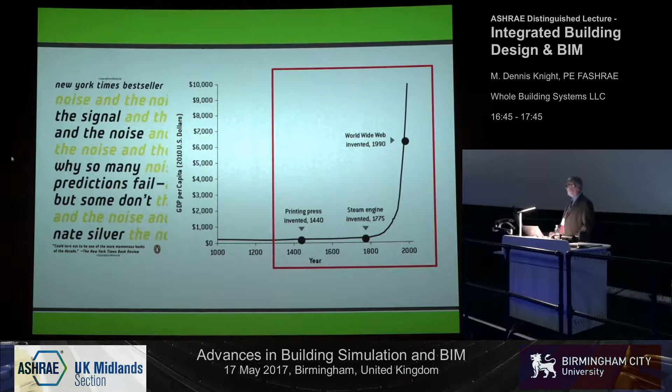So we've already talked about that. Some of the things we're going to talk about are BIM, integrated design. A little bit about my experience.

Throughout my career, I've been fortunate to be able to own several companies, one being an MEP design-build construction company and a general contractor, but also manage an architectural firm. And now, as I work toward using this gray hair to retire, I'm doing commissioning and trying to lend my experience to design teams in a design assist role to help avoid some of those lessons learned from my School of Hard Knocks. All right?

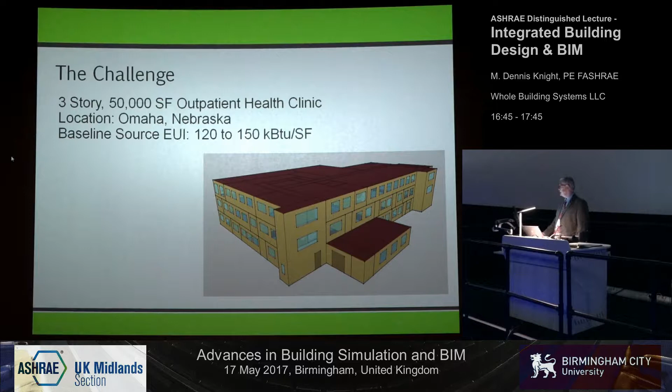After we said they had a baseline EUI, we gave them that, and from that point on, they were free to use that baseline to try to get to net zero. You can probably infer from the team names what software tool they were using, but I won't tell you what they were. But we had some great creative solutions, and these are modelers, okay? Some practitioners as far as design engineers. One team had an architect.

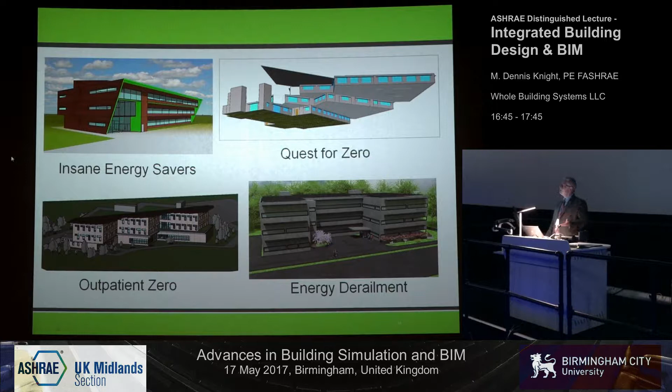This one right here, that's Annie's team using EnergyPlus right out of the box. Annie doesn't use a graphic user interface, and she can make EnergyPlus sing. So if you haven't got to know her, she's a great resource over here for any of you doing modeling. She is the chair of this year's conference, and she's chosen to take an existing building in Washington, D.C. this year.

And we have right at 100 people signed up with 10 teams this year. This year, they're not software developer-driven teams. They are actually led by practitioners who volunteer to work with a group between now and the end of September on the challenge. And then they come in, everybody does a poster, and then we evaluate and go through the first round of judging, and the top 3 to 5 are asked to present. They're given 15 to 20 minutes apiece to present.

And then we take half a day, just like this room right here, of Q&A from the practitioners and developers in the audience to have a conversation, just like I mentioned getting started, so we can learn from each other. How did you do this? What was your workflow? We're not looking for a specific outcome.

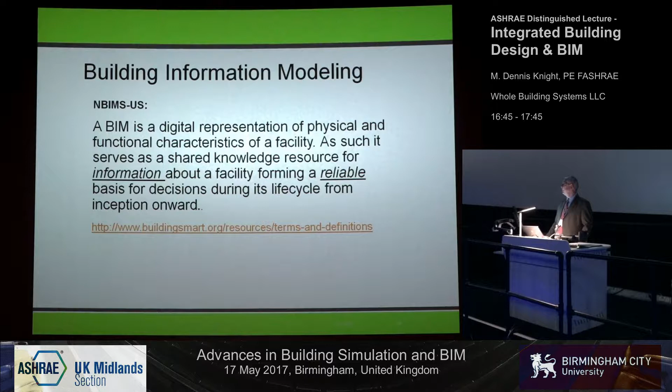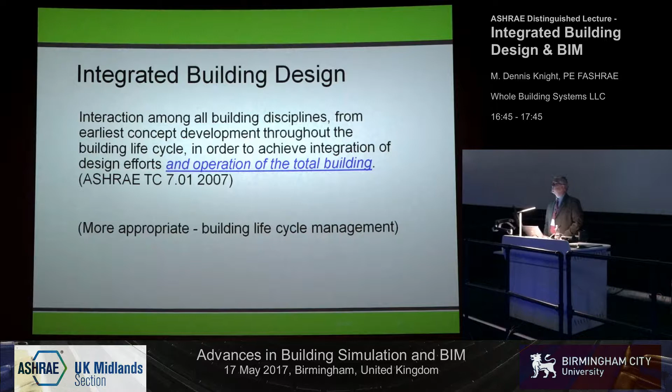And integrated design, again, it's the interaction amongst all the disciplines, and again, through the life cycle. This is ASHRAE TC 7.1, chapter 59 of the applications handbook, and includes operation of the total building. If you go to an architectural contract, an engineering contract, again, most of the time they stop at the end of construction.

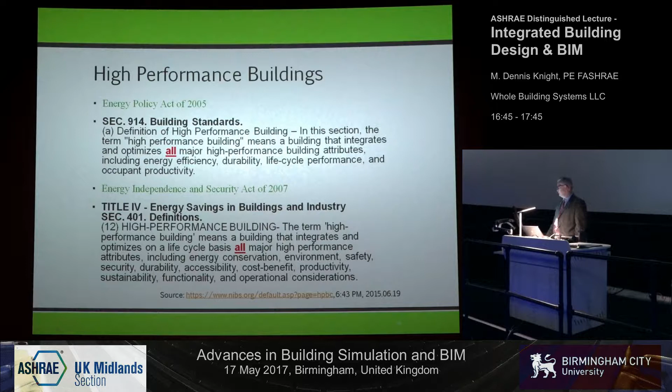High-performance buildings, their definitions. I often worry about definitions that use the words in the definition. All major high-performance building attributes, including energy efficiency, durability, life cycle, etc. But is there anything missing from those definitions? I mean, those are big, broad words. Lawyers would love them because they're hard to define, right? But how about things like indoor air quality? I'm sure they're embodied in those words, but there's no definitions for it.

Comfort, what's comfort? Visual, environmental, acoustic, indoor air quality. Anybody got any others? I mean, how might we define a high-performance building? A little feedback. User happiness. There you go. And I think we will tend to not focus as much on energy in the future as our rating systems and our codes move more toward performance. And it's got to be all about people, right? Health, safety, welfare, happiness, cognitive ability, the effects of the building and its environment on your brain.

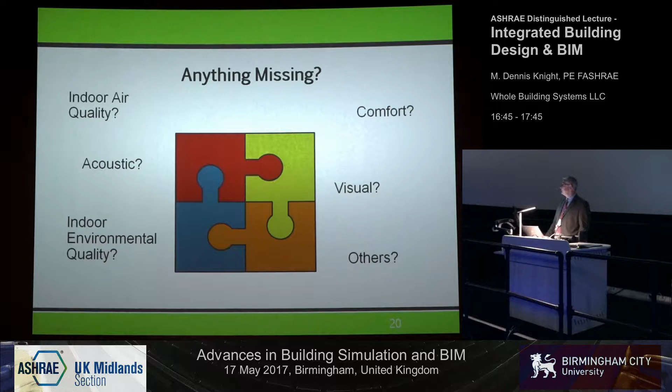And these tools will have to morph and begin to do that kind of analysis, not just daylight analysis, energy consumption, thermal comfort maps, but be able to simulate under many conditions, even disaster conditions, whether an indoor environment's tenable or not. That's why I asked about the fire simulation earlier.

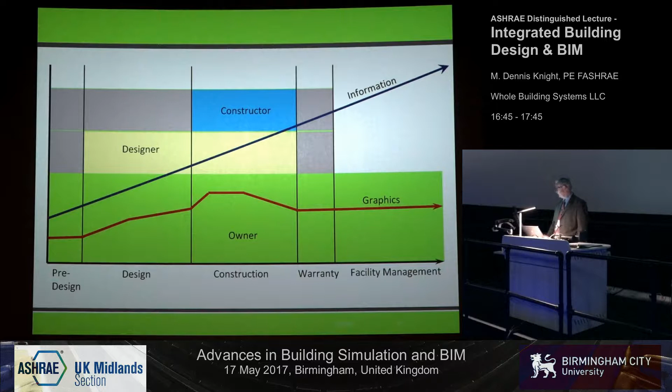So, who are the stakeholders? Pretty much everybody. This person typically holds the gold, right? And drives the train. But sometimes having the conversations early enough and asking the right questions, having that checklist-driven design based on your experience, and I'll show you kind of my manual process right now before I go into any kind of BIM analysis in a minute, of what a workflow might be, and hopefully at some point will get automated in these tools.

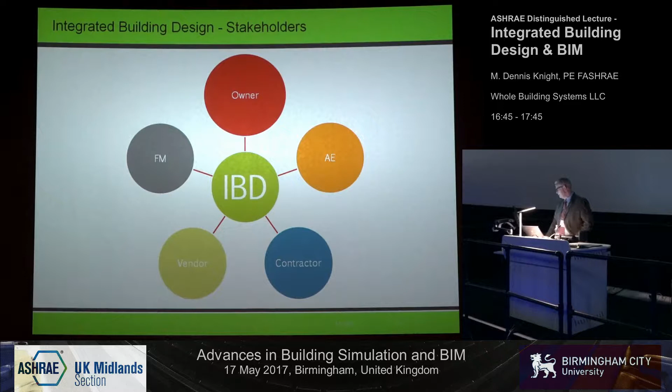But here's our stakeholders. What makes a building unique? Every building is unique between its site, its envelope, its uses, its systems, but also its users, its climate, its region, the culture of the people using the building. All those things make a building unique. And you as a designer or researcher have to understand that when you start developing these tools and working on these engines that can look at the various scenarios and come to those optimized solutions, or that series of optimized solutions, because there's not one, never will be one.

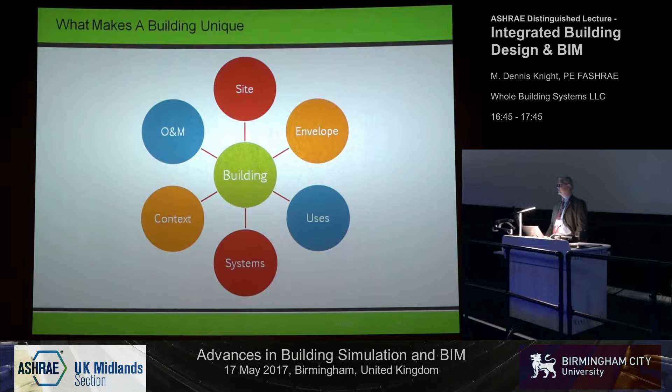Life cycle of a building, again, it's starting at planning, going through design, construction, verification. That's key. I do commissioning, and I've had so many texts and conversations with my colleagues back in the U.S. over the last 2 days on 3 university projects we got finished up now. We started pre-design with the owner, with the owner's project requirements. We defined envelope, indoor environmental quality, HVAC system design conditions, controls, interfaces, interoperability, and the school's got to be ready to be opened at the end of the summer.

And after numerous meetings between disparate systems such as lighting controls and building automation, you still have people that will not talk to each other until the day they show up on site to start their work. So we've got a little bit of a cultural shift we've got to work through there too. Training.

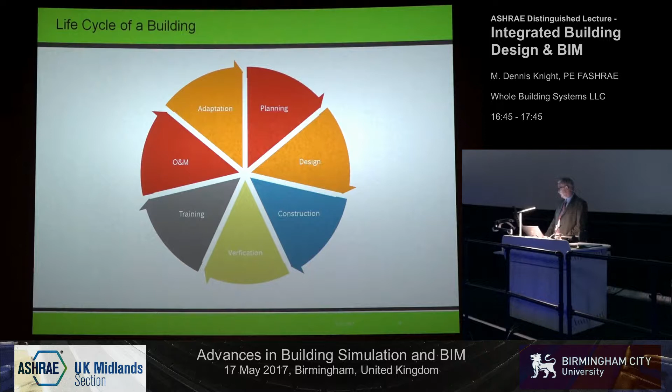In BIM, I'll just use this as an example, I see a lot of research going on. Some really nice things about how to use the data and do good things in BIM. I don't see many universities actually training a practitioner base to use these tools and use them well. If we don't get to talk about it before I'm through, I'd like to have some conversation with you all, and maybe at dinner tonight with my colleagues at CIBSE, as to where the universities are going with training our next generation of actual designers and the like. We should use a continuous improvement process: plan, do, review, that's ISO.

Now, BIM is a bunch of tools. We've been talking about tools all day, right? This is not proprietary. I'm not advocating one, even though some of my examples will use a tool, but there are a lot of good tools out there, and more coming online every day. When I started, we were using hand calculations and the ASHRAE Handbook of Fundamentals and solar tables, and to run just a simple 2-story office building could take you a couple of weeks sometimes.

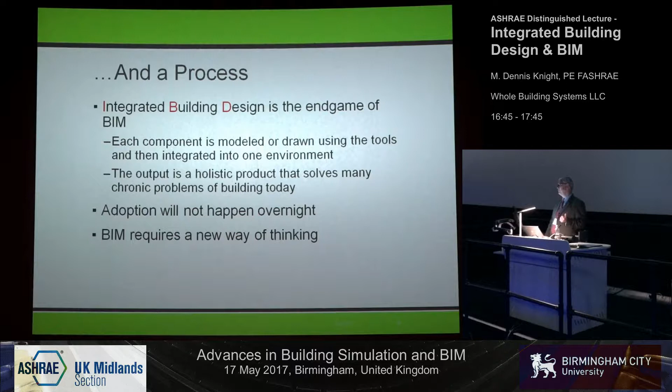Integrated design is the end game, right? We want to provide a building that does what the owner wants, that satisfies those user needs. But why is that important? Well, owners don't like when things like this happen, or this. Believe it or not, that's an actual university dormitory, and that's not just one room. That happened in about 140 dorm rooms before the engineer, the contractor, the building official, or anybody caught it. It was right at the final inspection when the state engineer caught that you don't put an electrical panel in a shower.

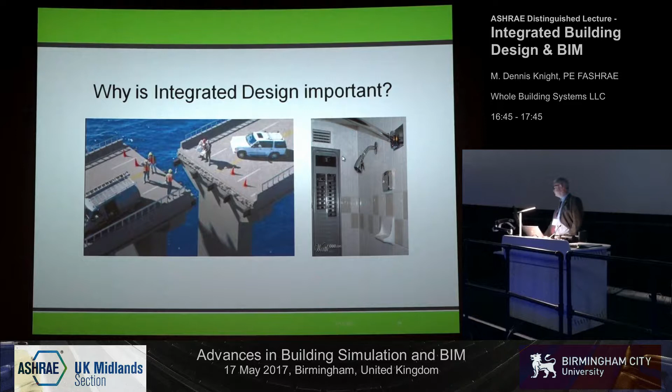All right, so what's our current process? As designers, we still work in silos. Everybody wants to do their job once, right? We don't want to spend any extra time. We don't care how many times you consider how to lay out the structure or the architecture or the lighting. The MEP guy wants to design the HVAC once. Our handoffs are poor. Right now we still hand off things in a manual fashion 7 or 8 times in 7 or 8 different formats. And that's a tremendous opportunity for errors and omissions to creep in, and BIM and our software and cloud-based solutions can help us solve that.

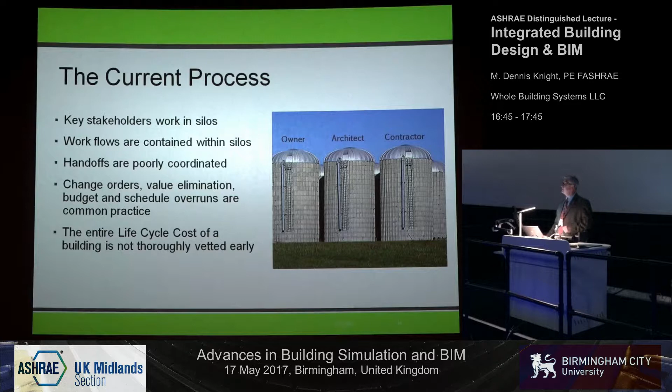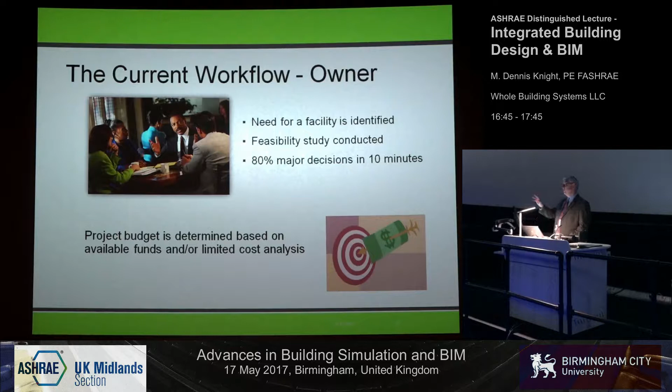Current workflow for the owner. Meets with an architect. After that first 10-minute meeting, about 80% of the major decisions are made with no analysis whatsoever that will determine the performance of that building for the rest of its life. Okay? Materials, systems, orientation, look, siting, climate zone. And we have tools. You've seen them today, and I'll walk you through a workflow with one of them in a few minutes.

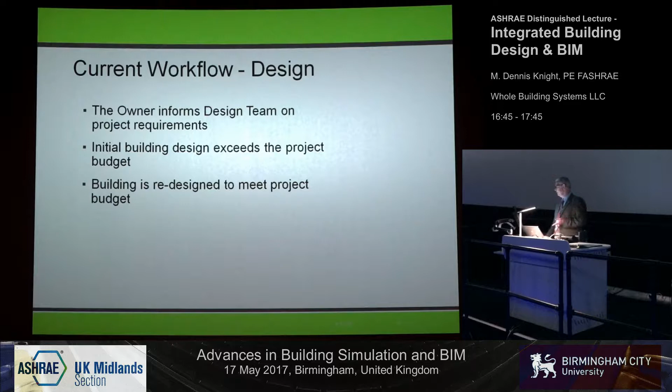Current workflow for the design team. The owner informs the design team, gives us a budget. The budget might be 5 years old if you're working on a federal or government project. Building doesn't meet it, it gets redesigned. Construction, same thing. We take the low bid in most cases, right?

And the impact of value engineering decisions are rarely known. In other words, you'll see in a second what I'm talking about. I've tended to call it value elimination instead of value engineering because there's no engineering going on in those cases, right?

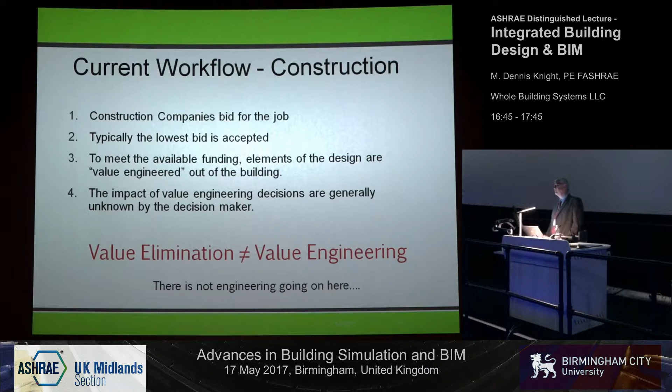And for facility management, we've forgotten them for a long time. So I'm beginning to see some research into facility management and integrating these tools into asset management systems and energy management systems and using some of the latest sensor technology such as wearables and things like that to get comfort maps, maybe a happiness map in the future.

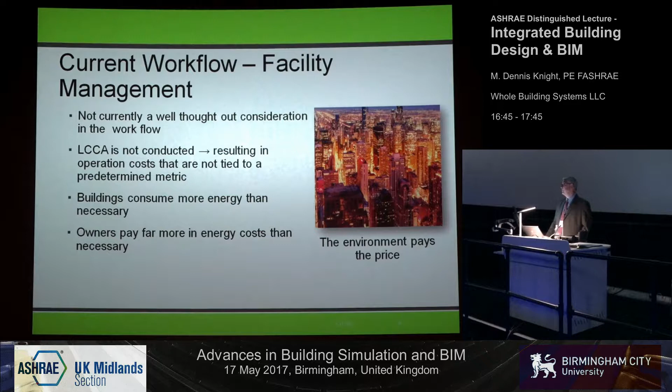But the owner then ends up paying for it, and maybe energy is not the main thing we need to be concerned about. Maybe how we generate energy might be the main thing we need to be concerned about. So how might it look graphically? All right, so this green line here is our ability. I'm sure some of you have seen this. It's often called the McCleahmy curve. Patrick McCleahmy at HOK took an old civil engineer diagram and added something to it here in a minute. But this is our ability to affect cost as we go along in a project.

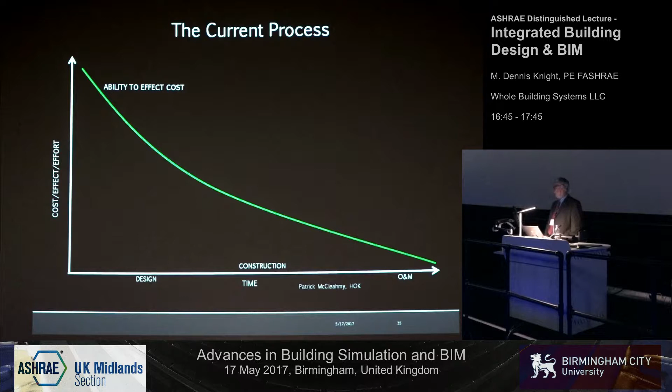And the further down that project timeline, and this works not just for construction, but any kind of project, research project, anything you're doing. Same time, the further down the process goes, the cost of changes increase astronomically or exponentially. And that's because once you've made decisions and they're set in stone and people have committed to the work and produced a work output or a work product, going back and changing it is expensive. And people tend to rather stick to it than admit that maybe something could be done better just to get a project done in some cases.

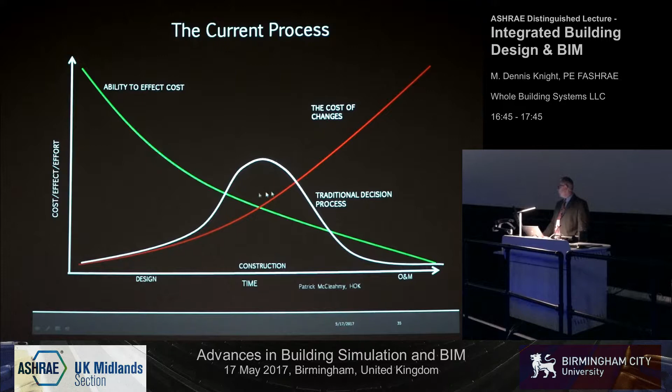And so this is our traditional process. We let that architect and owner meet just for a little bit early in the job. And then right toward the end of DDs or construction documents, we hurry up and get it done once. Project comes in over budget. We have to put a lot of effort in to get it back under budget, and then things settle down for a bit. And then we get the value engineering list from the contractor.

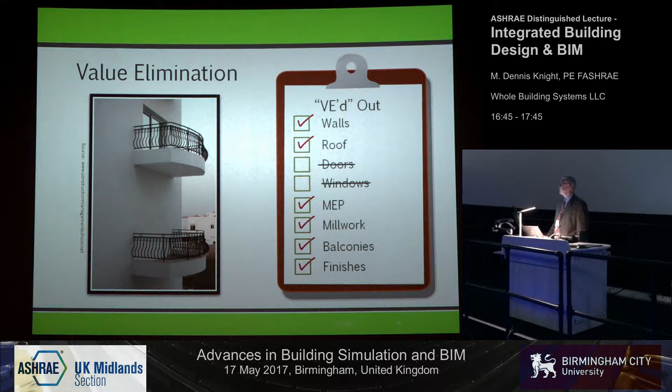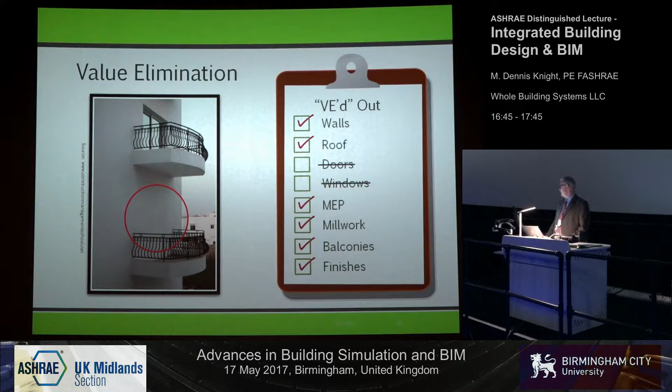And it's usually just a checklist, and it's handed to the owner, and he just starts with the biggest impact, the things that take the most money out. And without much engineering or any kind of consideration for the impact, a lot of times things get missed, right? And that circle was just in case you didn't see that. All right, so what we want to get rid of is this, right? We want to get rid of the value elimination hump in that curve. And how can we do that? We can move that analysis earlier.

And to do that, when I first started, after I got to the point that I had a computer that could run loads, it was fill out a book, take it to a computer center, get punch cards run, mail it 1,000 miles away, wait a week, pay $2,500, get it back, and hope you didn't have an error, right? So it was a long, drawn-out process. So again, you wanted things finished. You only wanted to run it once.

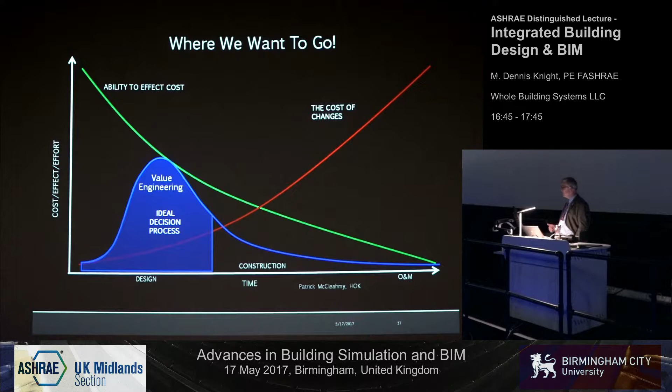Now we've got tools that can run in the cloud, run those optimizations, can run millions of iterations. So why aren't we looking here early? In what I would call the optimum or optimized value engineering location of where we ought to be thinking and talking about making decisions, informed decisions, and understanding what the uncertainty is in those things. So value engineering ought to be about making informed decisions. That's where BIM, integrated building design, and the processing power of our computers, our technology, the cloud, parallel processors, and smart experts like you all in this room come in.

Iteration of design can meet the budget. It can have cost built in, whether it's from a cost database or past experience. People say, well, BIM can't be used on a small project. Well, if it's a small owner, even if it's a strip shopping center or an office building, if there's turnover, BIM's valuable because you've got an accurate record of that as-built condition. And you don't have to go out and survey and measure that building every time you want to move a new tenant in and out or change or adapt a space, say, from an office to a data center, if you've got good data in that common data environment.

Lifecycle cost is a key. Comfort, lifecycle cost, finding those optimizations, that Pareto curve, as you defined it, finding those and finding them fast is where we need to be working toward. As an engineer, I think Andrew and I were talking at the break.

Andrew has spent a lot of time talking to architects and engineers about adopting new tools. And sometimes he was frustrated just because they wouldn't try something new. Well, I'm coming up on a little over 60 years old, done a lot of things the same way over and over again, and you get comfortable. You know you're not going to get in trouble if you're using something. So it's hard to get people to move off dead center and try something new.

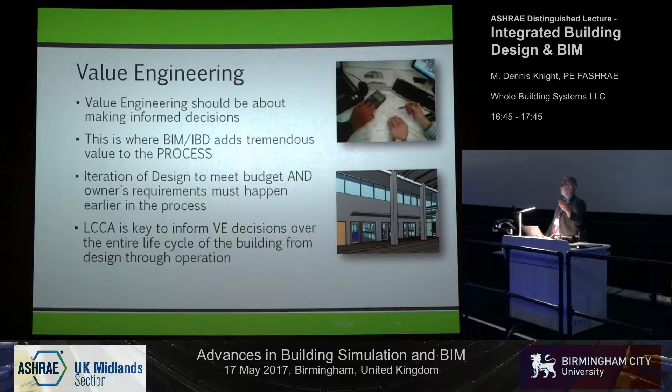And unfortunately, I think technology is probably ahead of the ability of designers to, one, afford those tools, the majority of the designers, and then two, absorb it and put it in without some good training. So we are at a crossroads between doing things in 2D as designers and moving into a multi-dimensional virtual work environment. I used to say 3D, and I changed that because we've moved beyond drafting.

3D to me just kind of gave the connotation that we're still just using these tools for drafting, and we're not. We're having to use these tools to demonstrate compliance, human comfort, human health, and those are the most important things, and those are multidimensional and go well beyond the physical characteristics of materials and spaces in a building.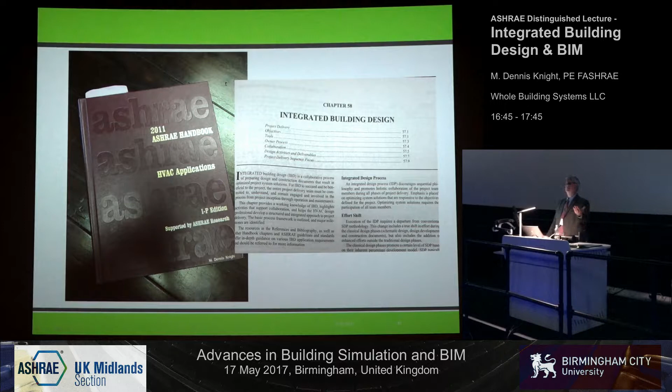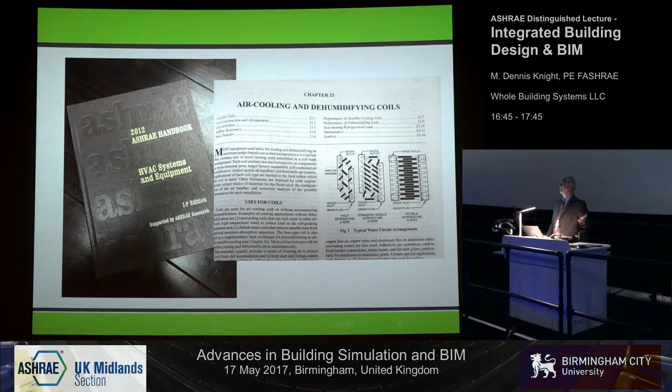Once I've done that and I understand the building and what systems, I go to that Systems manual and study those systems, okay? And understand what are the pros and cons. Can this owner operate it? Can this owner maintain it? Those kind of things. Then I go and look for current data, right? So I start looking at my journals, whether they be research journals, ASHRAE journals.

If it's specific to the building or the type of application, operating room, clean room, whatever, I try to educate myself, again, before that first meeting with the owner and the architect to learn about it. And then finally, go back to the fundamentals and understand what kind of calculations and analysis need to be made. And that's before jumping into anything.

Software documentation these days, a lot of times it's either hard to find or it's online, and if you don't know what the engine's doing, you're never going to be able to have trust in its output unless you've run it a lot of times and then had the experience of making the systems work in the field.

So let's move kind of into this digital environment. Not many of us work this way anymore, doing everything, right? We all have to work in some type of collaborative environment these days. There are a few big multidisciplinary firms, but the average size firm in the world is 5 people, construction or design, and in most cases very discipline specific. So you find yourself having to collaborate with multiple firms and multiple offices in many cases. And that's where your expertise, your little boutique, is valuable to a team.

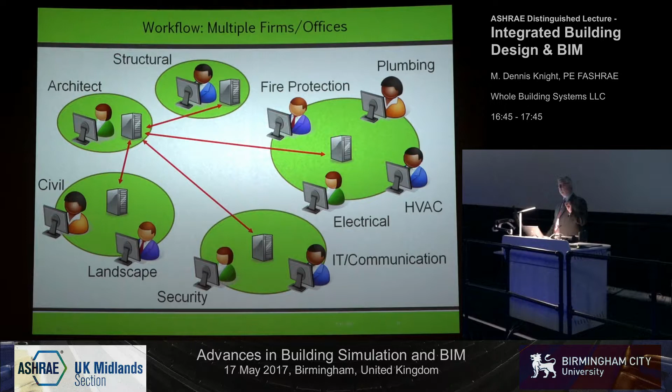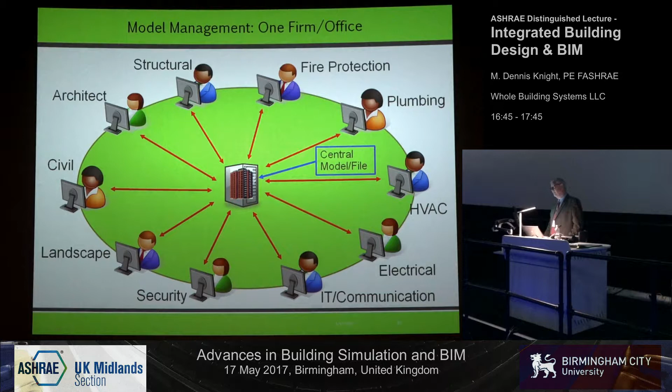And then some do work in this environment with BIM, you know, a central model, a server. But we're very fast moving toward a work environment where we're all going to work in a cloud-based parallel processing environment. In fact, some of the tools, the Revits, the ArchiCADs, the Bentleys, they're moving toward obsolescence, and their next generation is going to be really just a common data environment, kind of like Google Maps.

I don't know if any of you saw an AEC article not too long ago about next generation design tools, but the data, just like a Google Map or an Uber application, data resides where it's most appropriate. And then it's linked together in some type of common data environment where it can be used in the applications, whether it's fire protection engineering or mechanical engineering or electrical engineering or architecture. That application is there, not necessarily on your desktop, but just running in a browser, accessing only the data it needs so it can do the analysis you need in a reasonable amount of time.

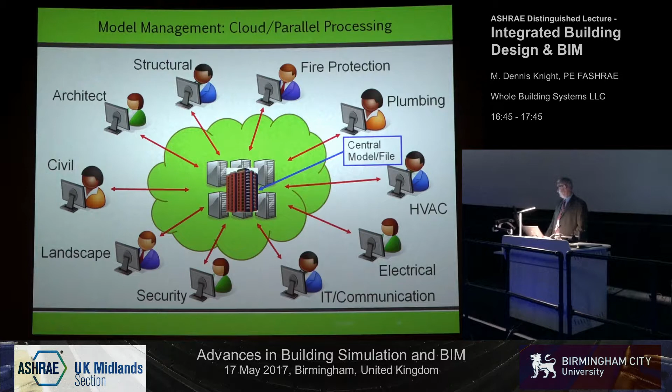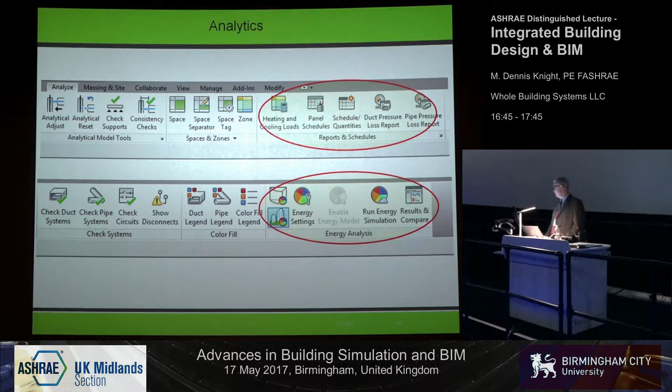So let's talk. A lot of the BIM tools are coming now with analytics built in, integrated tools, heating load calculations, energy analysis, renewable energy, daylighting. There's lots of other things that need to be added, just like I said, acoustics, visual comfort, thermal comfort. But normally that starts out with something like a mass, these things can be created.

You can sit down with an architect and an owner and a design team, and just within an hour or so, if you've got either an architect or engineer that's good with a sketching tool, a massing tool, add some floors, and actually add context. You can bring in those cityscapes and use the surrounding terrain as well to see how it's going to affect the building in its context. You pick a location, and right away you start getting results. And that can be in your energy unit of choice, or CO2, or dollars, or currency.

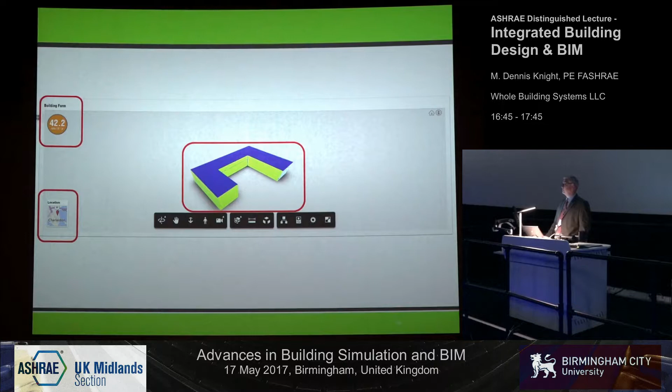But here are some of the ways that these tools quickly start keeping up with things and defining some of the uncertainty here. And I've gotten so used to using a touch screen that this is, hang on, here we go.

All right, so again, this particular tool gives you, if you'll notice, a range depending on the variable you're looking at. You can drag this thing down to a narrow window, or you can open the window up to multiple variables. And as you do that, it's constantly calculating what's your lowest possible energy consumption or cost, and what's your maximum based on the range within the variables you're looking at. And there's numerous ones of them.

And if you want to add a benchmark, if you're trying to design something, say like an ASHRAE 90.1 2007 or an Architecture 2030, this can keep up with your changes and give you a range of expected results. So you start thinking in uncertainty and possible ranges, or you can show an owner this and say, well, maybe if you leave infiltration, if that's one of the variables you're looking at, maybe the contractor's not going to really build this building as tight as we think it will, or those kind of things.

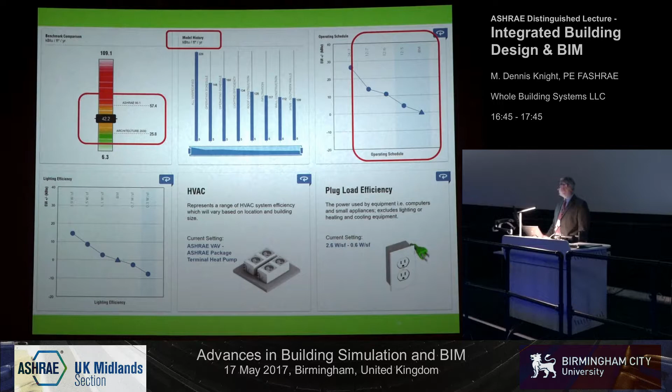So you keep up with your history. You can go back and compare different masses to one another, different operating schedules or ranges of operating schedules, and percent glazing, shading, solar PV, payback, those kind of things. And then these are the kind of results.

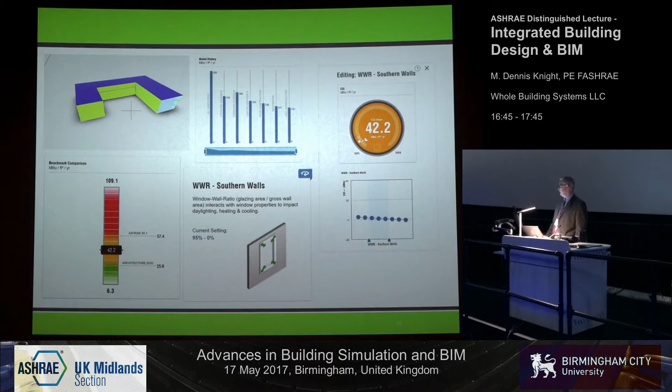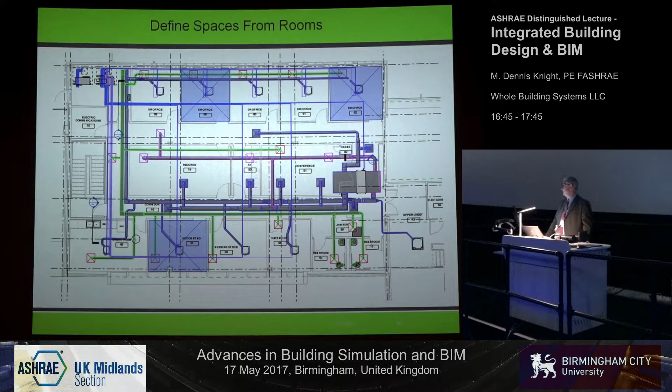Going through, again, I am trying to work through a workflow where I use the minimum amount of tools that I need to do the job right, and feel confident that I can put my stamp on and do engineering in these tools. So what might I do? I might define some spaces, create them, define my load parameters, which would be all the functional characteristics of my materials and rooms and spaces.

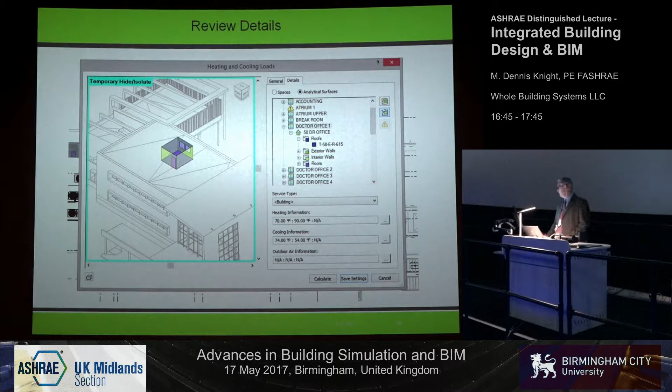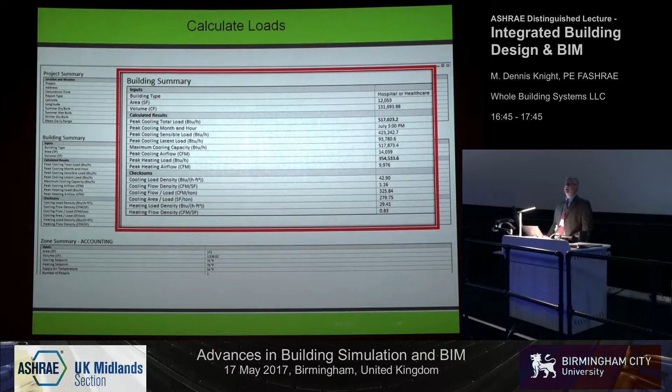Review those details, drill down, see if I've got any gaps in my model as a workflow, and then calculate my loads. And this is just a little blow up to show that it's an EnergyPlus engine, DOE-2 engines, they're good, trusted engines in the background, running, and they're producing outputs that we see every day from some of our other standalone tools and our integrated tools.

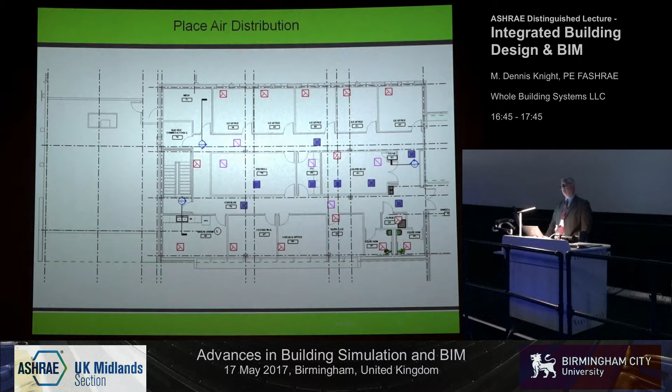And then finally, when you get into design, once those are run and that data is stored in the space it's associated with, the way I used to do it manually was I'd lay out my air distribution devices. And I'd locate my equipment. Then I'd start connecting the dots and sizing things. Well, these tools can now start connecting these dots and sizing things for you.

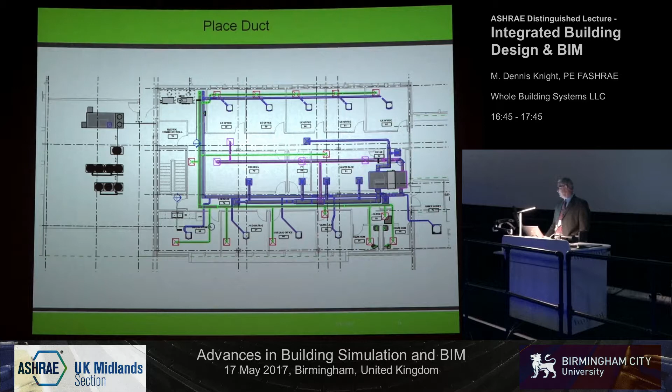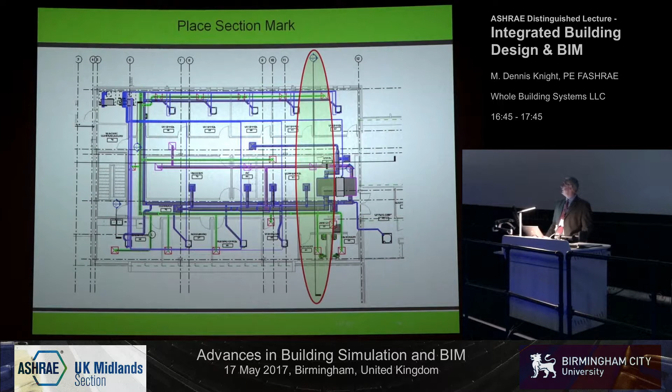And using ASHRAE Handbook of Fundamentals, and thermodynamic algorithms that we've used in school and our whole career, just as long as you understand what kind of coefficients and what variables you're using in the software. Place your pipe. One of the things I like about this tool is the things I don't have to do anymore. I don't have to cut sections. I can create a section. I can expand sections. Nothing has to be hand-drawn once you've placed your systems in.

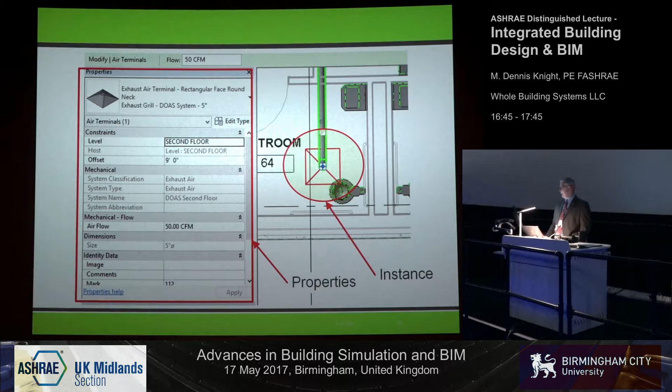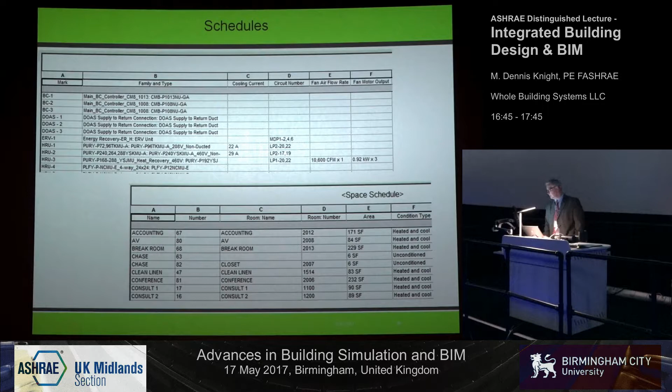We've got properties that some get calculated, some get manually input. And I'll skip through. Schedule generation's another thing. Schedules are important, not just to go on a set of tender documents or bid documents, but I create a lot of schedules that I use just for design. Areas, volumes, lengths of pipe, pounds of ductwork, those kind of things. So there's a few documents.

Let's talk for a minute or two about codes and standards. This was an introduction. It's available for free. It's a little old, maybe a little dated, but it's still got some good processes in it. I'm going to leave a copy of this here so you all can get it. And there's actually 101 slides with notes in this deck, and I've hidden a lot of them, so feel free to distribute it, with all the slides turned on.

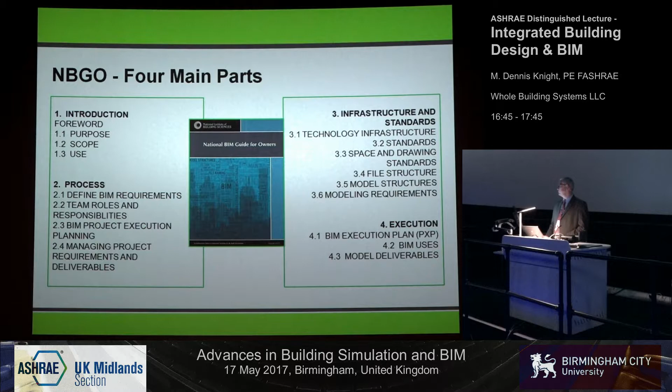Worked on this. This is called the National BIM Guide for Owners. Very similar to some of your PAS 1192 documents, and this hopefully will move this summer to be written as a standard that explains to an owner what's the minimum viable amount of information that needs to be in a BIM for it to be useful, and how to ask for that and write that into a contract. It's written for the owner, and it's to cover all phases. Doesn't talk much about intellectual property. That's still a sticky situation between the legal and contracts.

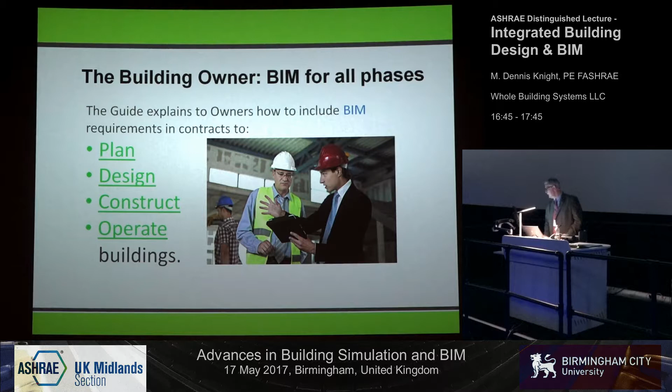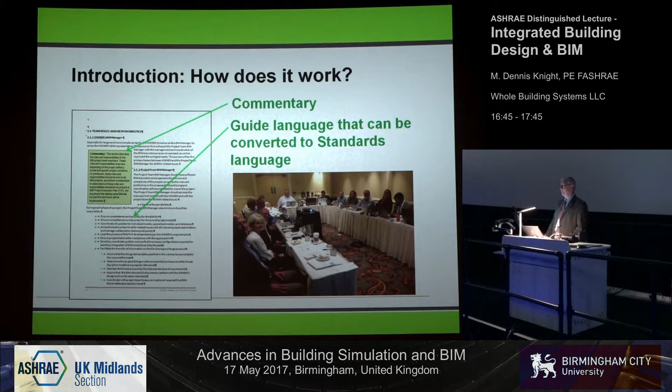We've got commentary that explains why things are done, and then we've got guide language on how to get those requirements of what you want in a BIM, so an owner doesn't pay for things he doesn't need. ASHRAE 90.1, the big changes in Appendix G can be used for compliance path.

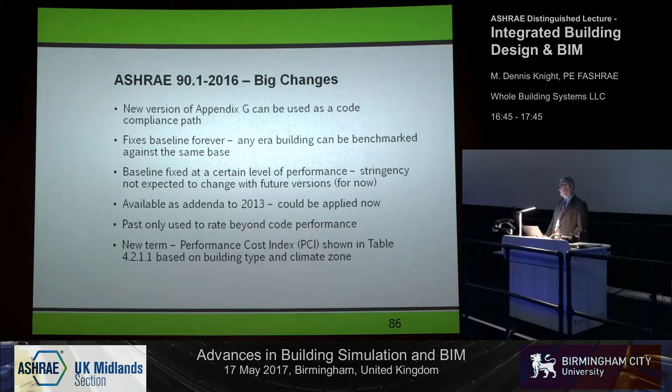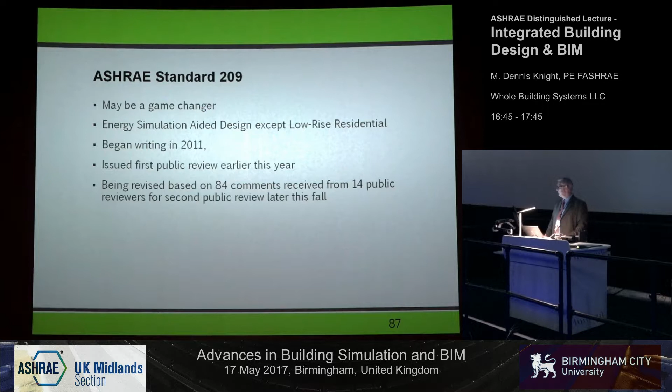One big change is, as well as LEED version 4, if any of you work on LEED, ASHRAE Standard 209, which hopefully will be approved as a standard after its third public review this summer, requires at least a shoebox model, that massing phase model, be run, and a written report to the owner be given on how these simulations, this performance analysis, were used to inform the design. So that's a big step forward in moving this modeling earlier in the process for us to push our technology to be more useful.

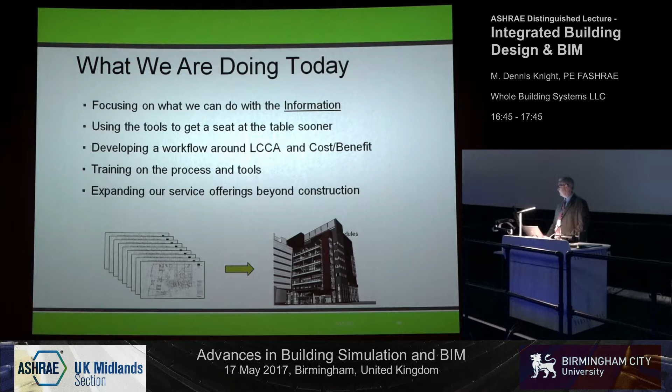Today we're focusing on what we can do with the information. We want a seat at the table earlier. We want to stay longer. We're trying to learn the tools the best we can and use as much of the tool as possible, going beyond construction, staying with the job for life cycle. I'm going to get through these real quick. Future's already happening, of course. Anybody doing integrated spec writing? Or BIM to fabrication and BIM to simulation?

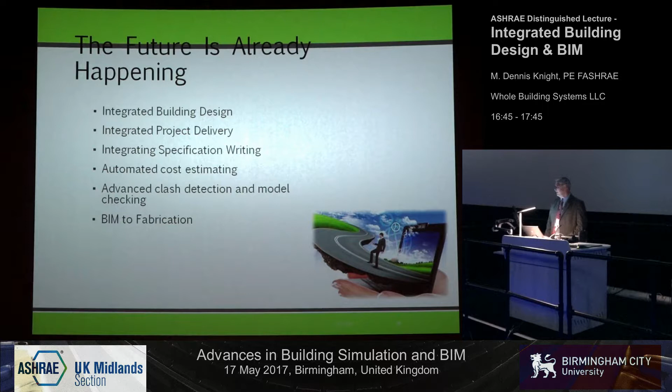We've talked about some of these things already, so I'm going to move through them. But the process is you all, and that's where the most work needs to be. How to use these tools, how to integrate these tools, how to combine these tools to do a good job at producing great buildings, great environments for humans to live in and work in and play in. All right.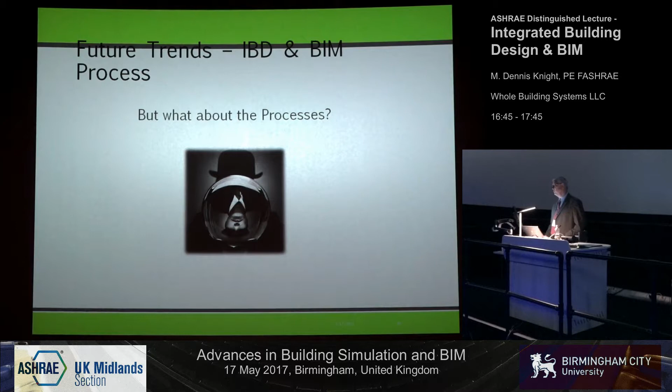Some of our barriers, again, even though we've talked about interoperability and integration, those are still our biggest barriers to success right now. We do need open source solutions. The handling of information, consistent application of the technology.

So its impact on ASHRAE. Well, ASHRAE, I showed you those ASHRAE handbooks. We're working toward creating smart XMLs and rule sets so those can be used, put in a common data environment, and be accessed by a developer through an API or whatever, so that if I'm doing a design and I do something that's at variance with an ASHRAE standard, I get an alert or a notification, almost like spell check in Word, that says, hey, you might want to look at this again, you've done something that doesn't meet 62 or 90.1 or ASHRAE 55, something like that.

And we've got a lot of our handbooks and TCs working on that. Real quickly, here's some of our resources, if you haven't gotten a chance to look at some of the things like the National BIM Standard, NBGO. All of this needs to be harmonized, I think, to some extent worldwide. So we need to be talking to each other. That Whole Building Design Guide's a great resource for anybody working on buildings.

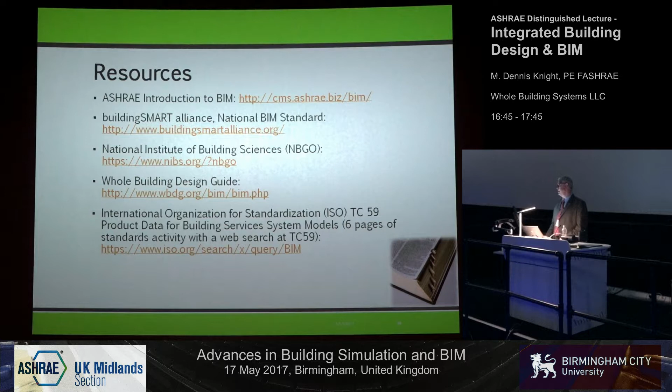ISO, again, if you go to ISO and just TC59, search for BIM, there's 6 pages of standards and technical activity on building information modeling standards and data exchange. And of course, you all know about these. These are mostly yours. I'll be interested to hear how they're working, especially with some of your mandates, BIM Toolkit, and others. So how do we harmonize all of this, and should we?

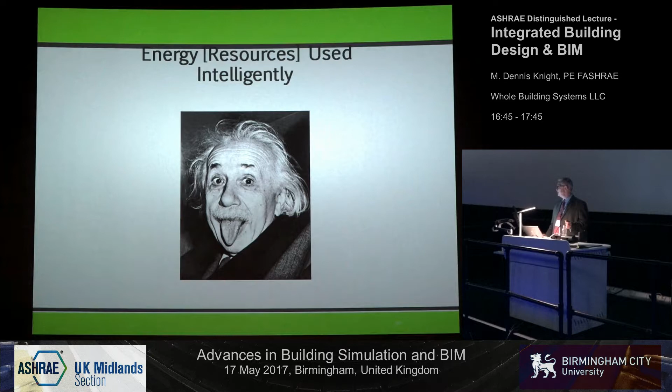And maybe I'll come back to this one, but I like to say, I used to say EUI, energy use intensity, but energy used intelligently is what we ought to be thinking about. And more importantly, with a focus on a human being, resources used intelligently, right? That's where our minds need to be. And our end game needs to be making our decisions better, more informed, and earlier in the process. So let's go back here. If we want to do our Q&A from here about how we harmonize this and should we and how might that happen. I'm really curious in your feedback.

Well, I think that's been absolutely fascinating and raises quite a lot of questions for our industry moving forward. Well, anybody got particular questions for Dennis, just to kick off with? It's not a question, maybe a comment. What do you students think? What's the future of our industry?

Yes, sir. Well, I'm visiting from the University of Queensland. We have a multi-million-dollar advanced engineering building. And it was all talked up to be wonderful and that we could have our students learn how to use it. But it's really hard to actually get the models from the architect, because you ask and you get PDF plans, and who tries to build a model with IES or whatever. We paid a lot of money to have this thing commissioned, and then to have the continuation of using this building, to continue to learn about it.

Somebody's got a model somewhere, but all they send around are PDFs of plans, you know? And not smart PDFs, at that. Yeah, they're just flat plans. So then you've got to spend endless hours pulling out your hair trying to figure out what a cross-section of the building looks like, how it's put together. So that's just an example.